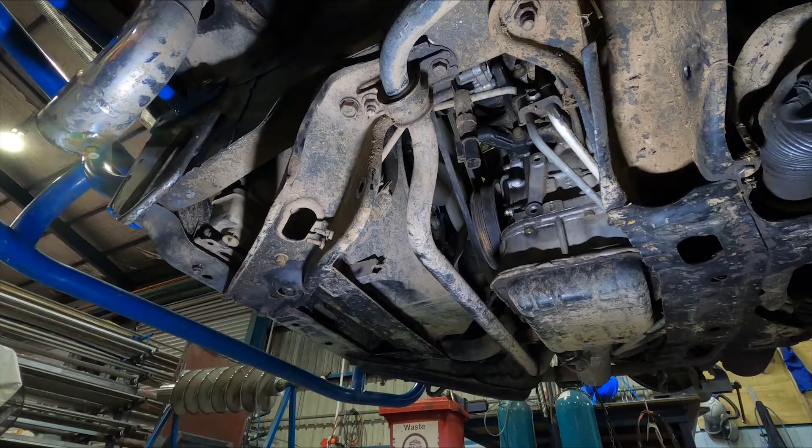It's currently Thursday, we're one week out from Matsuri in Taupo, Winter Matsuri. So I've signed up for that. Can't wait to get there, it's going to be epic.

So the car's running mint. The wisest thing to do would be to just give it a wash, put it on the trailer, get it all ready to go next weekend. But we're not going to do that. We're going to strip the whole thing down, put a roll cage in it, and a WiseFab angle kit. All within a week, well, a few late nights. See what happens, eh? Let's begin.

Alright, so first up we're going to start with the roll cage, the main hoop. We're going to find the centre of the car.

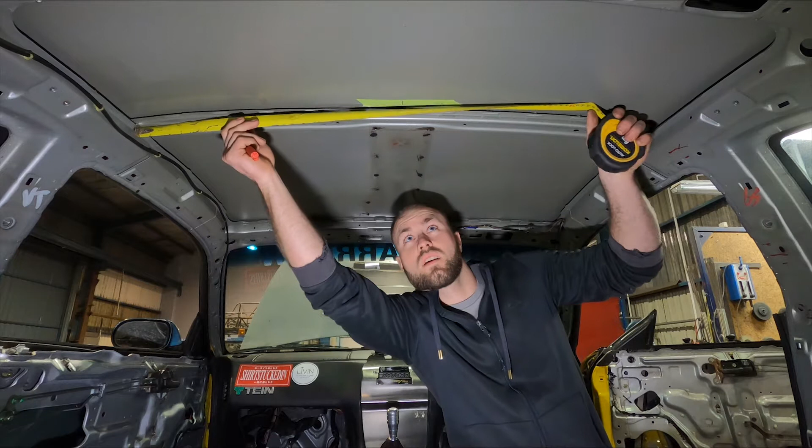So from there, across the head, we'll go 490 there. Pretty close. 489 would be spot on.

So now we've got our centre. We're going to use a digital protractor to see how level the car is. It's always good to start off with a level car. It's pretty spot on. That's basically vertical, that's perfectly vertical actually.

So from here across the top we're going to have 90 degrees. So we're going to angle here and angle here. So this angle plus that angle is going to equal 90 degrees.

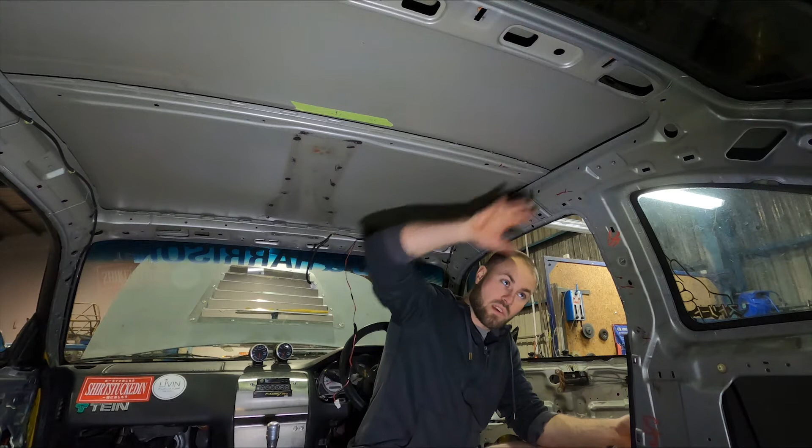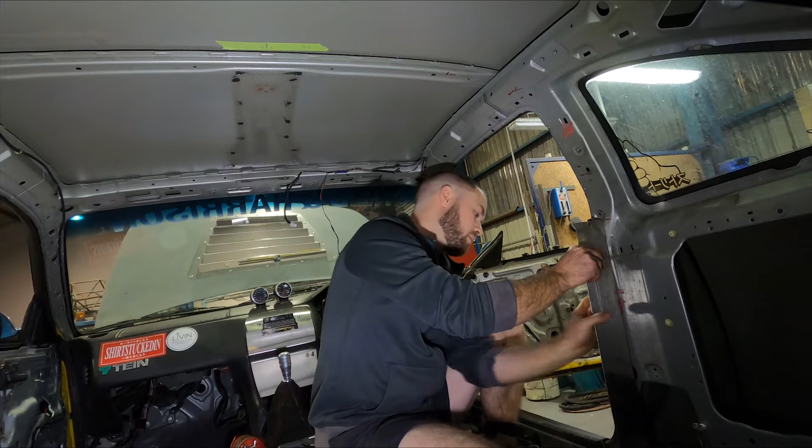Easy peasy. So we're going to go from where we want the bottom point touching the outside of our pipe, set that on there, to where we want it touching on the side of the car there. Set that on the side. We're going to press zero. You can see that, zero. Boom, and we get our 300mm rule.

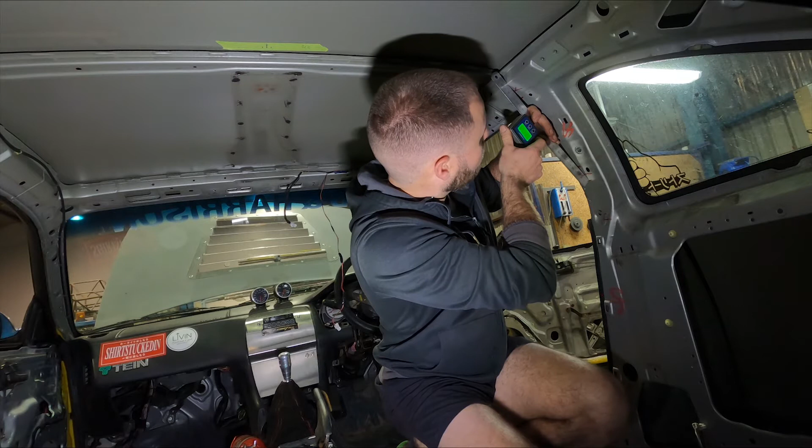We want our touching points, and there. 38 degrees, 38.5, we'll say 38, boom. And we already know that the car is level, so whatever this here is going to be our top. We'll say 52. 52, 38 equals 90. Easy peasy.

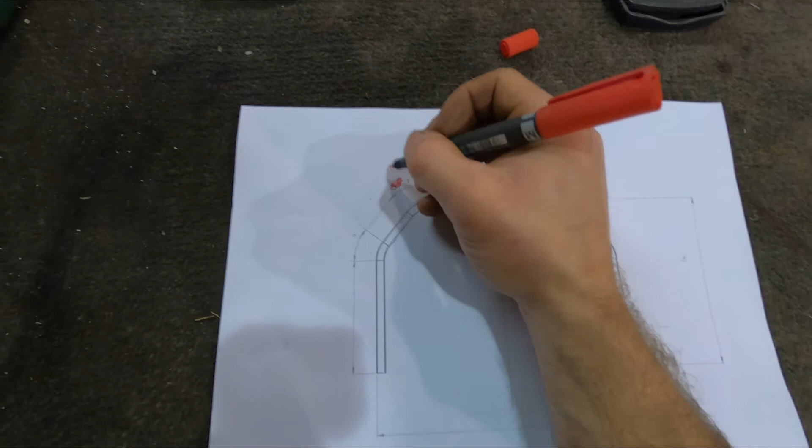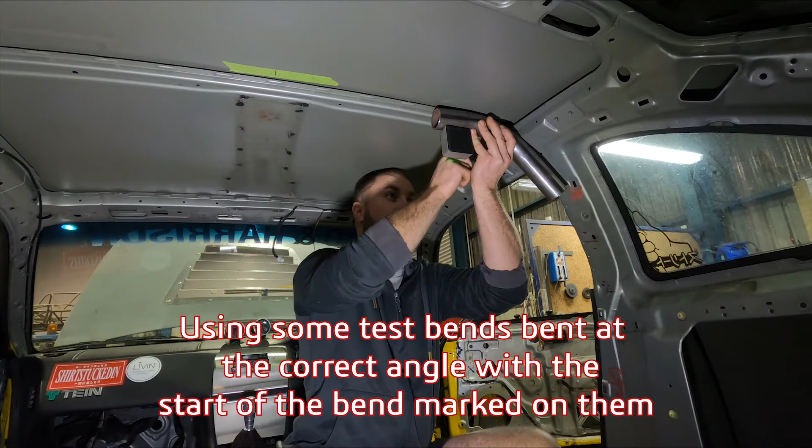So from the centre of our car, hang on, so this is our centre of the car there. We just worked out this is going to be 52 and this is going to be 38. 38 plus 52 equals 90. And we can put a mark where the start of our bend is, so we can measure from this point back to the centre.

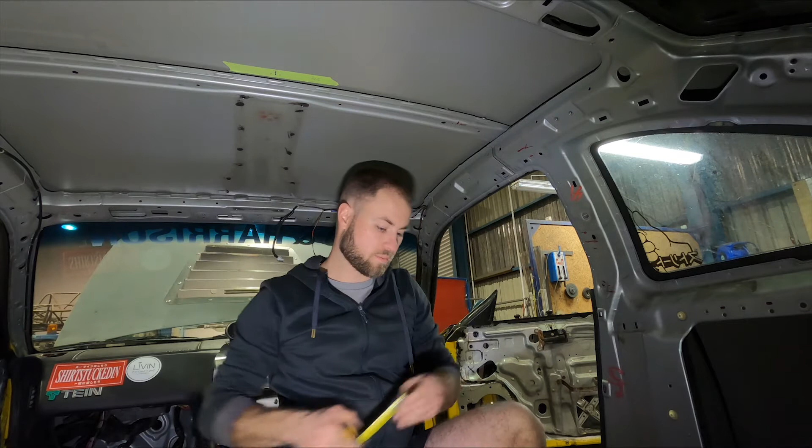Which is 375. Then we'll mark on the car the end of that bend there.

We want to set this here at our 52 degrees. Slide it up and down until we hit 52. Yep, pretty good there. And we'll mark side of the car, boom, start of that bend, boom, boom. Then we can measure from that point to that point, 230 and 590.

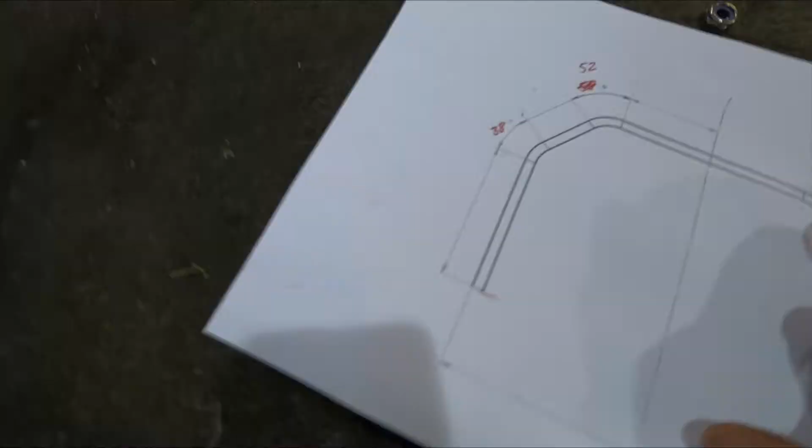So that looked a little bit better. Sweet, and this one here was 378. 375, 378, to make it nice and tight.

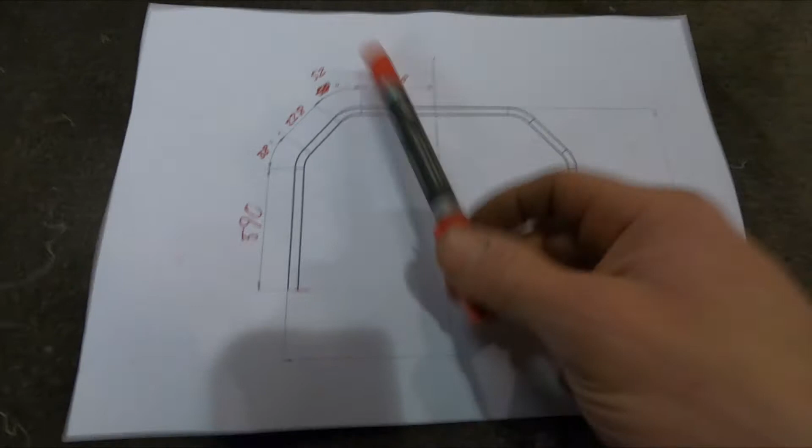So now we can add up our straights, that plus that plus that. Whatever that equals, times 2 for this side. Then we'll do our bend allowance for our angles. Then we'll come out with a cut size.

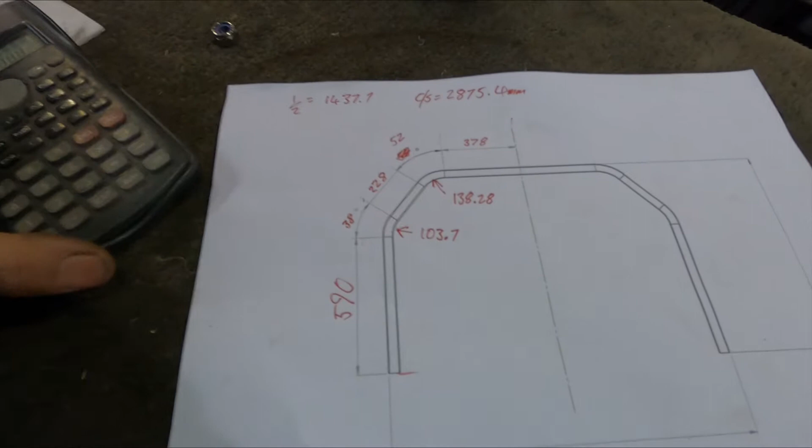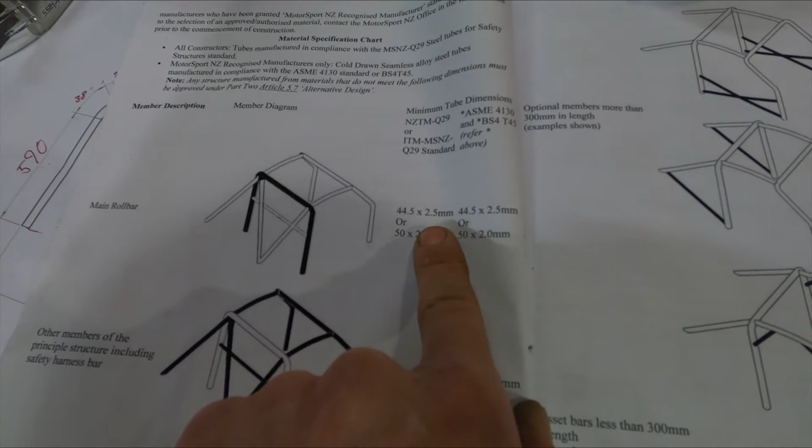Alright, so we just added all that up using our calculator and we got 2875.4. Let's go cut it. And as per Motorsport NZ rules, New Zealand, we're going to be using 44.5 by 2.5mm CDS Q29 roll cage tube.

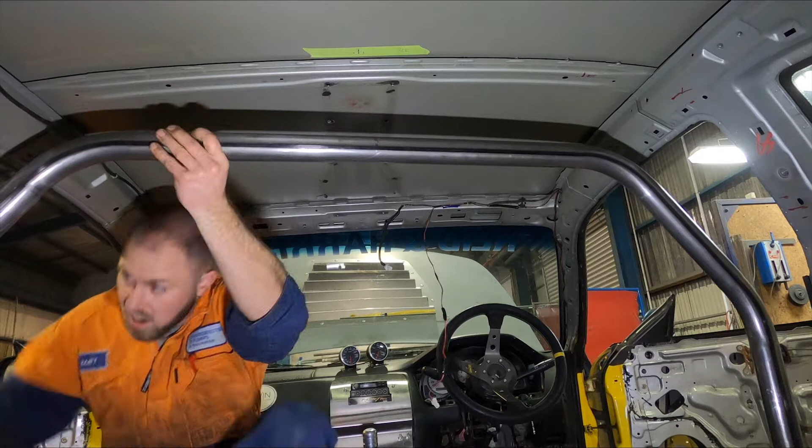Now the moment of truth, see how badly I stuffed it up. Crikey, crikey dip.

You know what they say, tight is good. Don't want it loosey-goosey's. Loose is no fun.

Oh yeah. Not bad, not bad, not bad. I think that's gonna be pretty jolly good.

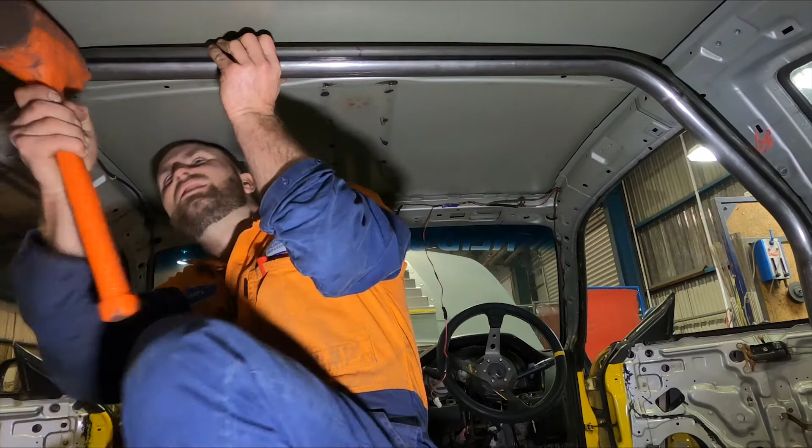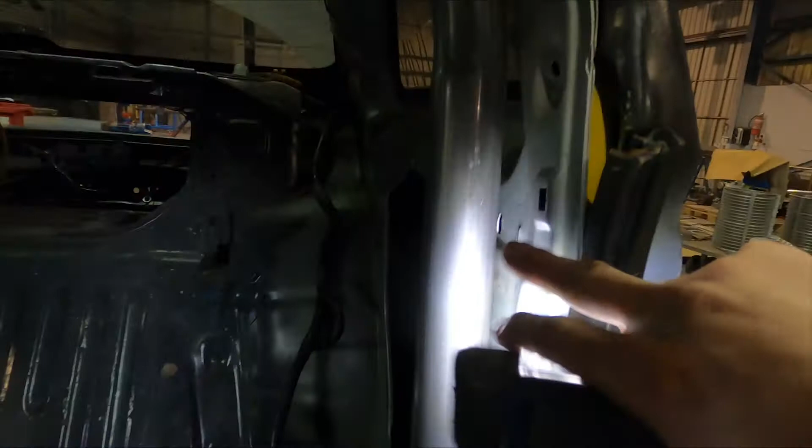There we have it, a sort of fitting hoop. So we got a super duper tight, like ridiculously tight actually. This is actually tighter than the S15. So should be able to weld stitches to the body, no need for gusset plates.

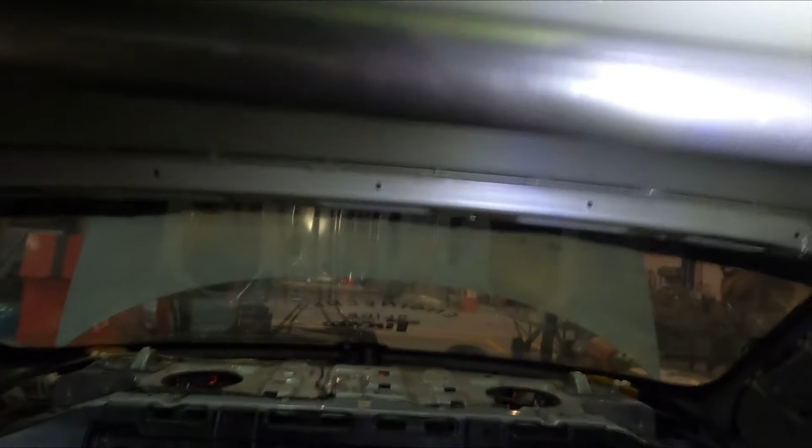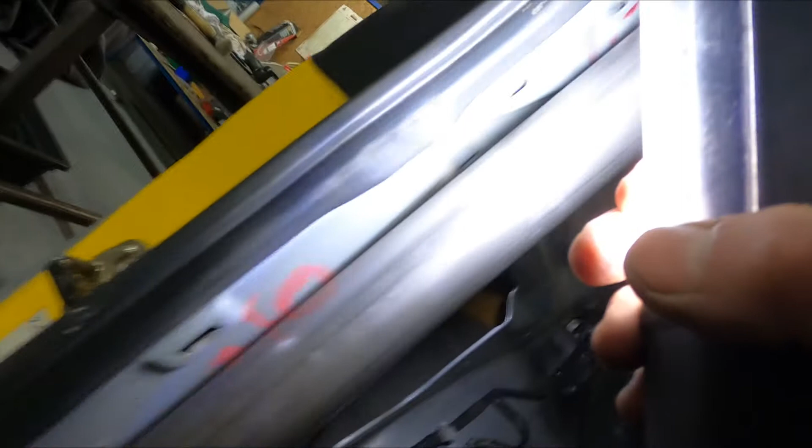Obviously I need to take a bit out of the bottom, so we'll leave it off the roof there. And then it's going to come forward, so I can put some stitches onto this. Stitch it along there, stitch her up there, and same down the side. She's nice and tight. Alright, let's... what's next?

So I'm going to cut out, I'm going to make up some foot plates for the main hoop to go. There's some hole saws down here so we can drop the cage above the tops. But I'm actually thinking these two, oh no, I'll be alright. Pull it on with a tie down. She's going to be tight, but tight is good. Good is tight.

And I might cut out this here, so then I can get the TIG torch or MIG around the back there a lot easier, so it can be fully welded. It's probably a little bit tighter than what I wanted, but tight is good. Good is tight.

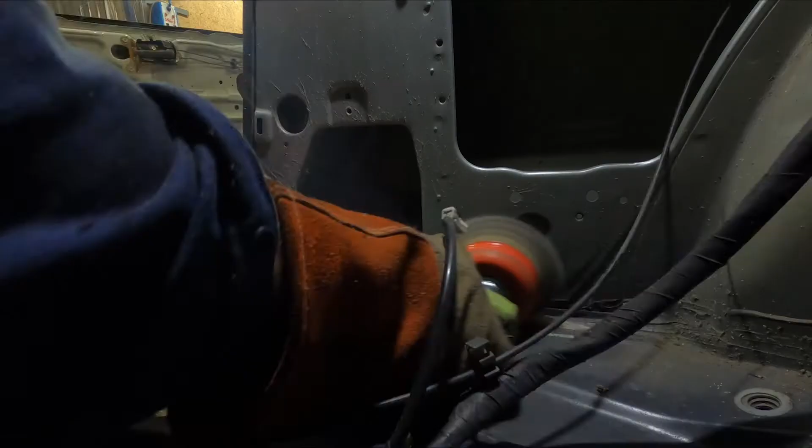Alright, now it's time to drill some holes. I'm going to put big fitty through here, right in the corner. Same with the other side, so when we weld the tops of our cage we can drop them to the floor.

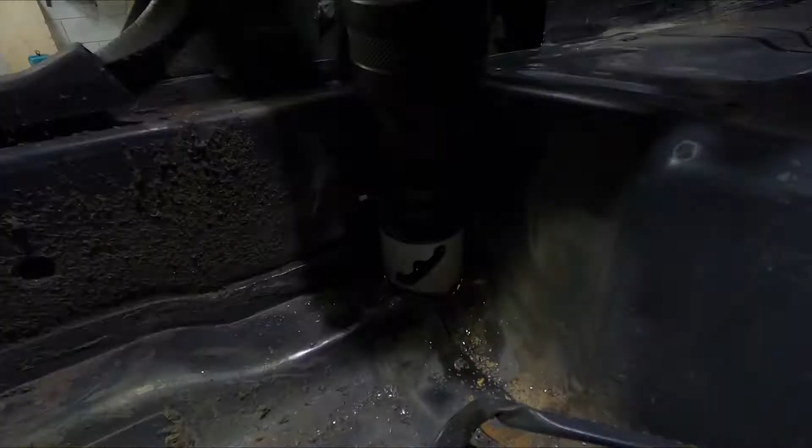Then we'll go cut out some footing plates. So it'll be one plate will fold to go over that section there that our main hoop's going to sit on top of.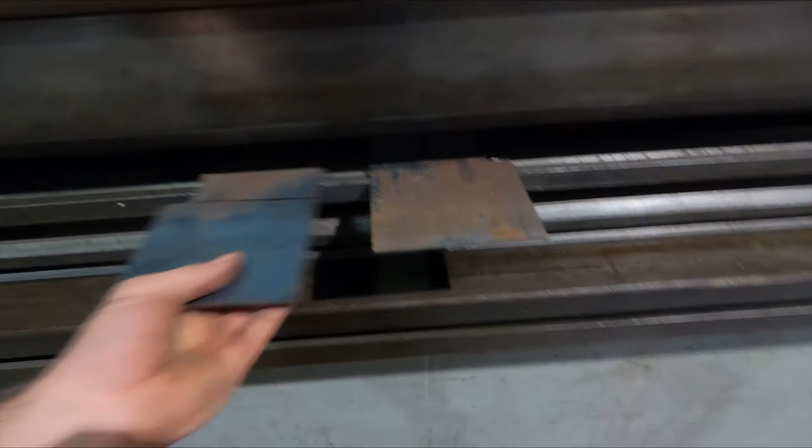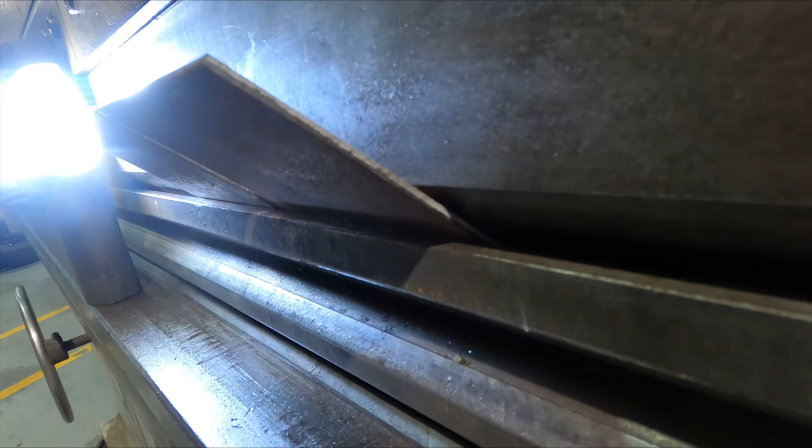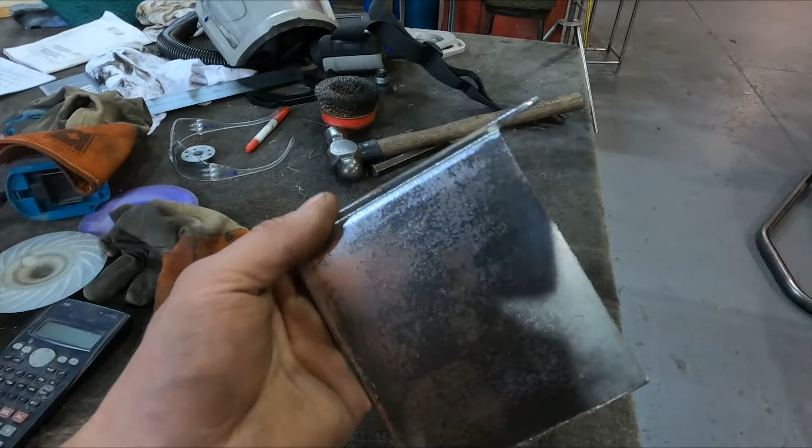Alright, so we've got our footing plates all cleaned up, radius to sharp corners, deburred them all. It's going to sit in there like that.

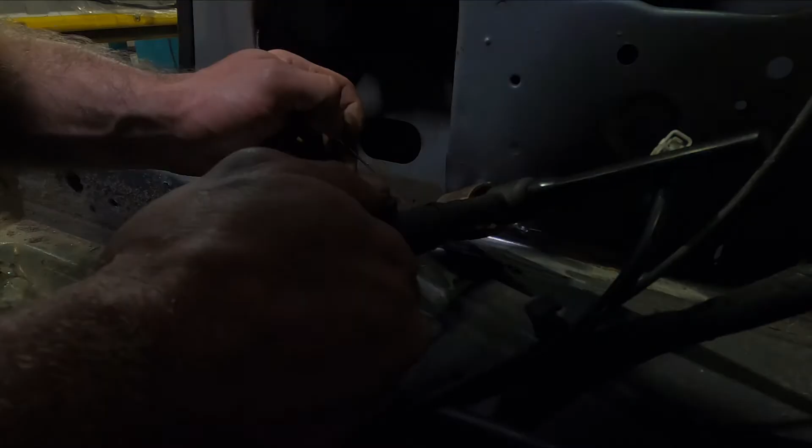I'm only TIG welding this because the MIG isn't set up at the moment, but I think I probably should go get the MIG.

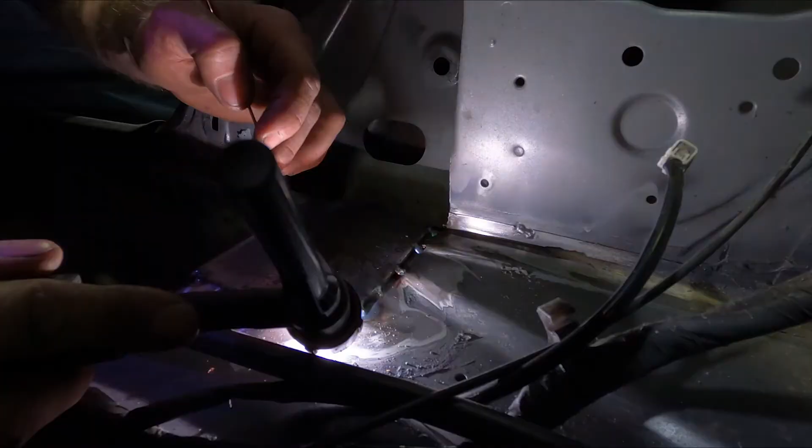Alright, so we got both the foot plates tacked in. Time to weld them up.

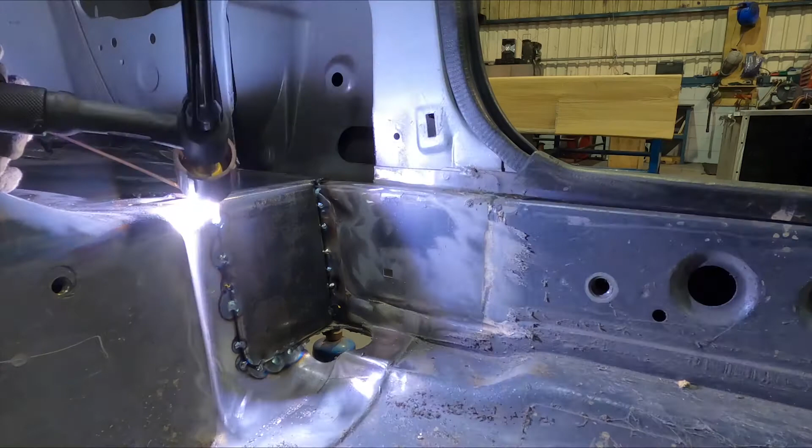So we got the plates fully welded in. So I've just put the main hoop in, I've trimmed it up to where I wanted it. So she's sitting hard up in here. Absolutely mint both sides. I'm actually really happy with how tight it got. So she's zero gappage.

And then we've left maybe 4 mil off the roof, 4 mil off the roof on those 2 points. It's obviously a bit bigger in the middle, but it's all good. So that's basically where I want the top sitting.

So now I can do the backstays, get the backstays tacked on there, locate where I'm going to go on the back. I've also cleaned up this here because, oh fuck, I'm tired. I've also cleaned up this here, so I'll do another patch like I did in the S15.

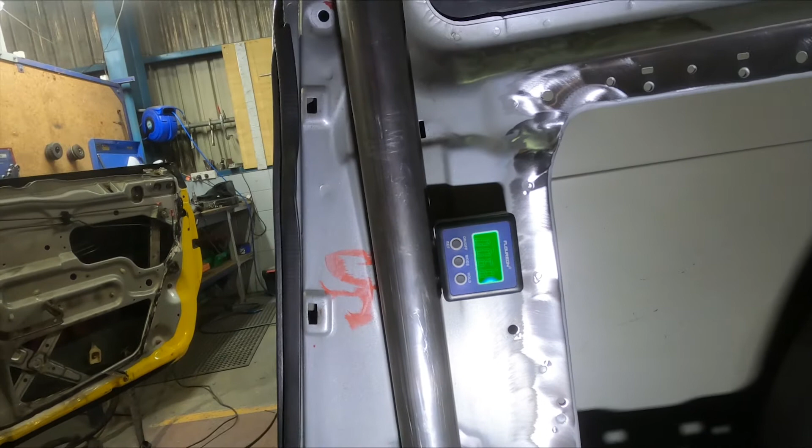No more than 10 degrees off vertical. So we're 89 degrees, so it's 1 degree off vertical, which is pretty good. Yeah.

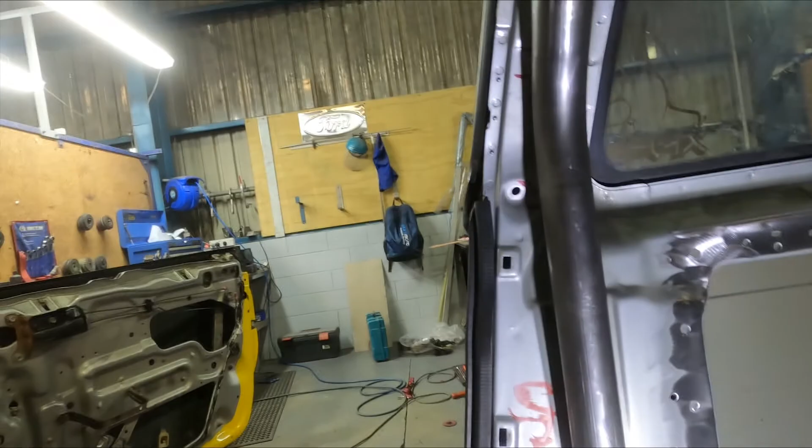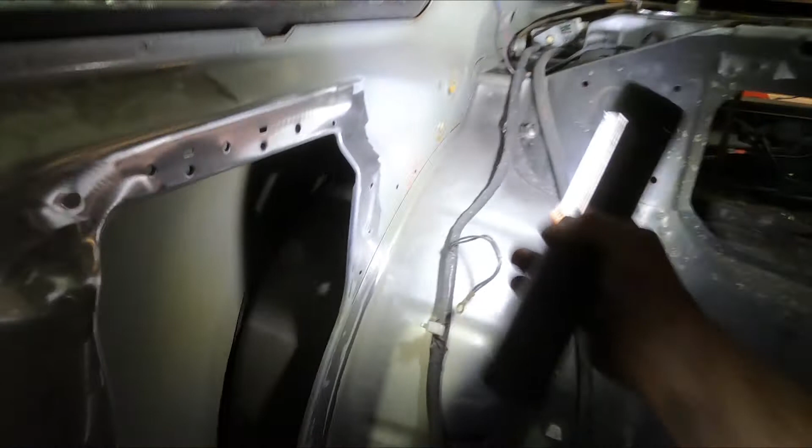Guess we'll figure out our backstays and then we'll have to pull the dash out because I'm a lazy bugger and haven't done that yet. It's getting pretty late, so I might just clean up where these rear plates are going to go and call it a night probably. See what happens.

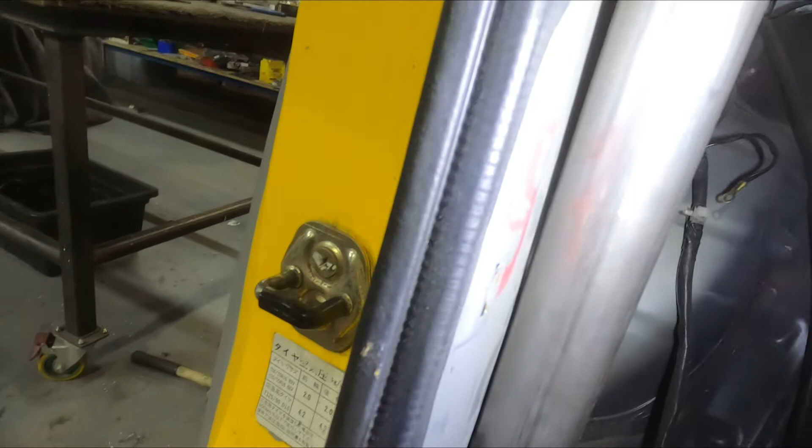But look how tight that is. Oh, gorgeous.

Alright, so we just cut out our backstay plates and I'm going to put them up in there, weld them up in there. So they want to be as close to the body as possible, or the outside of the body as possible, and the backstays have to be at least 30 degrees off vertical. So where I'm putting it here is about 45, so we're pretty good. So we'll get that tacked on there and yeah.

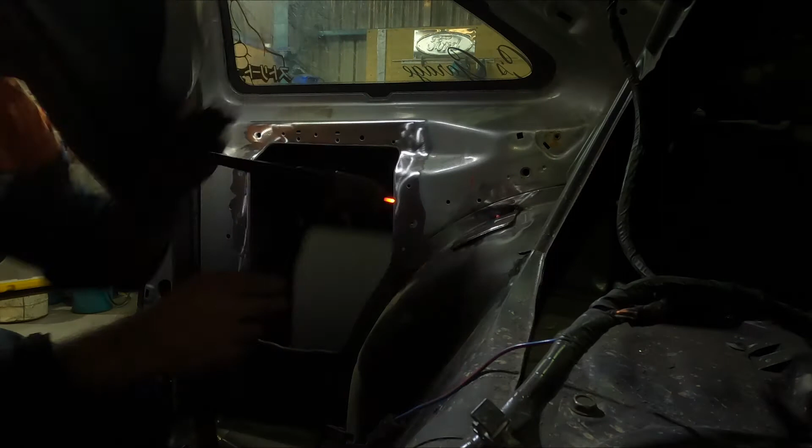Body filler or something behind there, and it's horrible. It don't like me, and I don't like it. We're not friends.

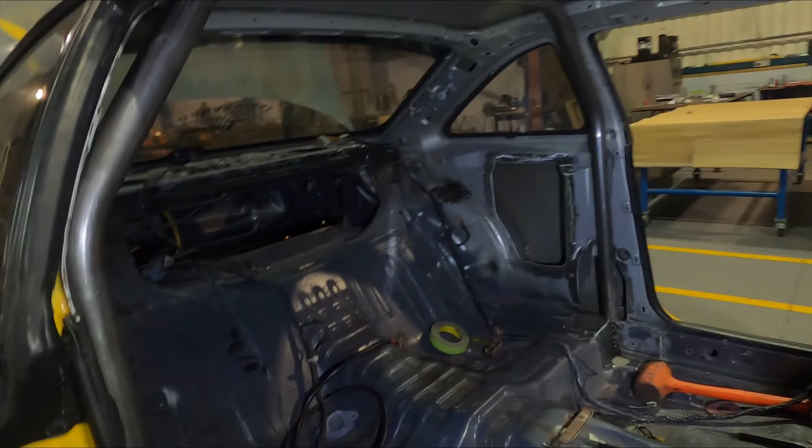Alright, so progress tonight. We have accomplished bending up the main hoop, the footing for the main hoop, and the backstay plates, which looks like absolutely stuff all, but by the time you clean everything up, drill a hole, plan and bend stuff, it all adds up. But pretty happy how that hoop turned out. It's going to be nice and tight.